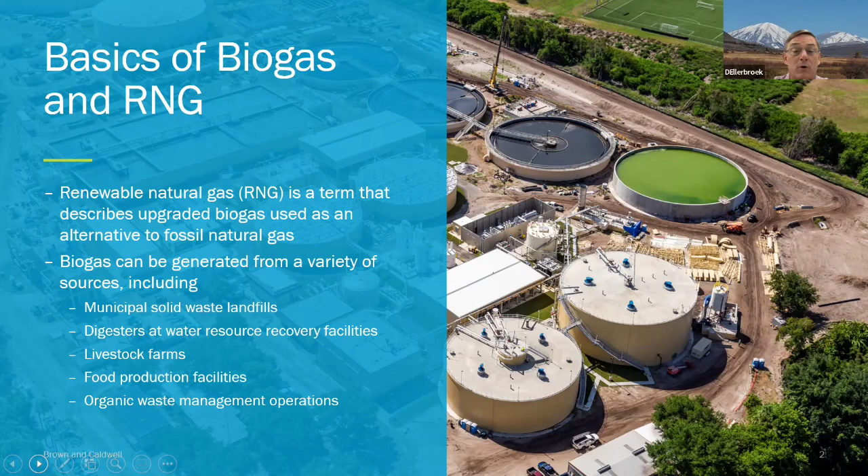So basically, the content of your gas can vary based upon your feedstock and your generation method. So what you're seeing here is two of the common sources for biogas. One is landfill waste, and then the second one down below there is anaerobic digestion, which can be animal waste or food waste or any organic waste for that matter. But biogas from organic sources made through anaerobic digestion generally contains about 45 to 65% methane.

So you have to treat that biogas to remove a number of constituents, moisture, particles, contaminants, and then other gases such as carbon dioxide, oxygen, nitrogen, and VOCs. So the goal of the treatment process is to get the methane content up to around 90% or greater. And then you can produce RNG compressed gas and put that into your natural gas pipeline.

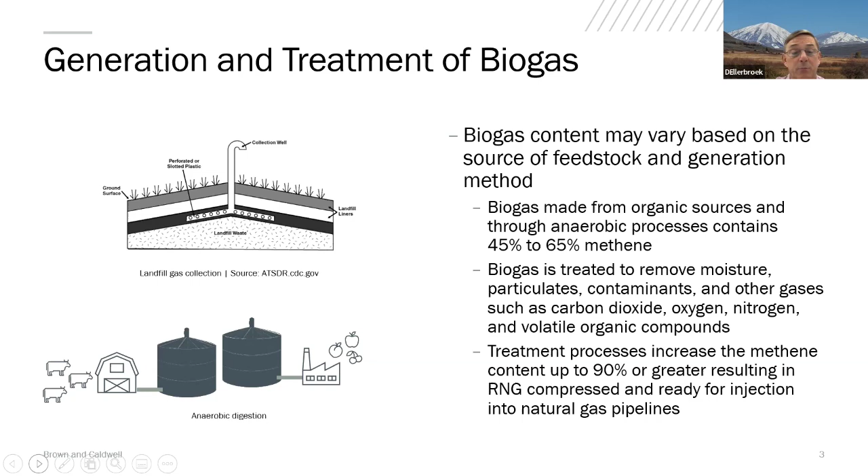So this slide basically shows a couple of different processes for two of the more common sources of biogas. On the left-hand side, we have landfill gas treatment stages. And on the right-hand side, we have anaerobic digestion. You can see that looking at the end uses, they're basically the same. It's heating, electricity, or other industrial uses. But if you look at the process, it's a little bit different.

So when the gas comes out of the landfill, you have to go through what they call a knockout pot, which basically removes moisture, and then the gas is filtered and may be flared to get rid of some of the contaminants, some of the non-methane gases. And then you go into a secondary treatment process where you have moisture removal, taking out the sulfur. You then compress that, and that's your biogas.

And then to get to RNG, you have to go through an advanced treatment process. And that's basically to get to the quality that you can put in the pipeline or use for vehicle fuel. So we're going through a process of removing a number of the gases, carbon dioxide, oxygen, nitrogen, VOCs, then you may have to flare some of the contaminant gas, but then it can be compressed and used as RNG. So on the anaerobic digestion side, you can see that it's a little bit simpler.

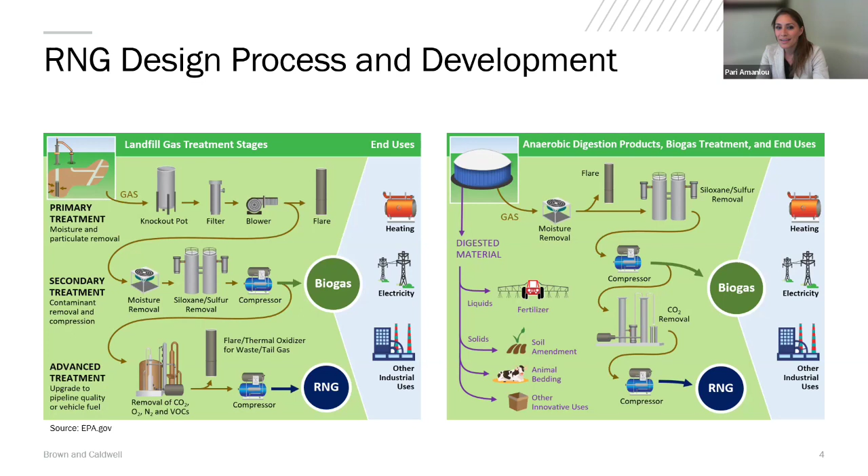And it's important to note in anaerobic digestion, moisture and pH levels definitely yield different amounts of methane through the process. So tweaking those parameters can improve your process dramatically. With landfill, you pretty much end up with what you end up.

Right. And you'll see, I think it might be the next slide. No, it's coming up, but in one of these slides, you'll see how the landfill gas has been going on for some time, but we're really seeing a big uptick in this animal waste anaerobic digestion over the last few years, I think since like 2018.

So there's a number of applications and benefits associated with RNG production. One of the things you can do is produce green electricity, so non-carbon fossil-based fuel that burns in an engine to create electricity. You can produce bioproduct feedstock, such as plastics, makeup, diesel, and other chemicals.

There's roughly about 2,200 large U.S. wastewater facilities right now that produce about 4.7 million dry metric tons of biosolids, and of that, about 4.2 million were disposed on the land. So there's a lot disposed of using land application, landfill, or incineration. I'm sorry, those three categories. So, Pari, were you going to add something to that?

It just goes to show with population growth that we have an enormous amount of opportunity here to capture those solids and utilize them in a fashion that limits land application and also generates renewable resources for us in the energy sector. Right, and it's not just the solids.

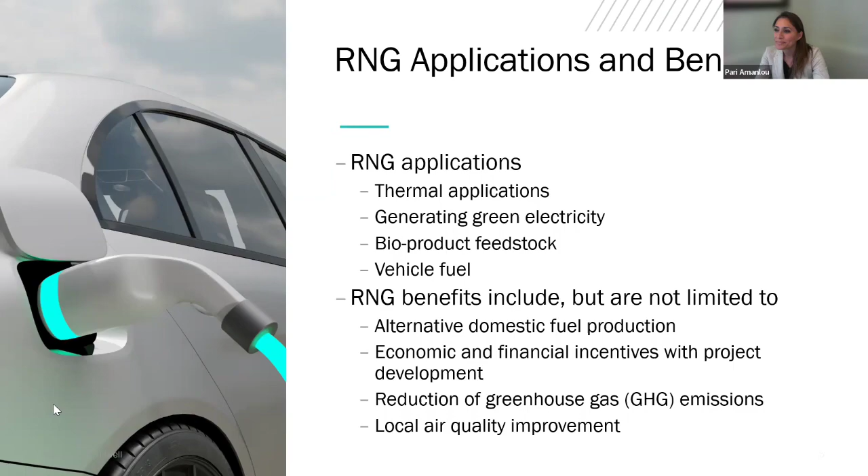Fun fact to add here, Dave, is about 9% of methane emitted into the air is from animal waste and manure. So it's a large source of our methane emissions into the atmosphere.

And with that also a great amount of opportunity to capture that methane, a large sum of methane. And that's why we're seeing an uptick in particularly ag RNG projects. Initially, there's a large source of methane there, but now we're also seeing a shift to using other forms such as biosolids, co-digestion with food waste and animal waste as well.

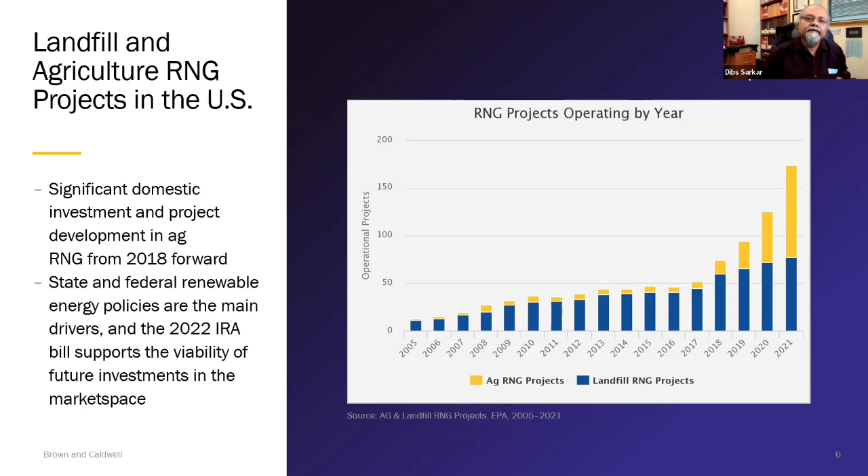Yeah. All right. Okay, let's see where we're going. I got to reduce this. I believe we skipped one, Dave. Did I skip one? I believe so.

Yeah. So you want to talk to this?

Absolutely. Some of the benefits of RNG in comparison to other renewable energy sources: anaerobic digestion and biogas are not subject to weather or seasons, unlike wind and solar that are dependent on wind patterns and seasonality. If the sun doesn't shine, you don't have solar power. It's a 24/7 operation. So as long as you have feedstock, and that feedstock is typically generated pretty consistently on farms, municipal waste facilities and other industrial facilities, you can pretty much count on generating biogas and through that developing RNG.

Because of that, it's considered a base load renewable energy, meaning it's consistent in its production. And it's not necessarily used as a supplemental energy form, but it can be used as a primary energy form. And in many cases, we're also seeing that biogas is used to create electricity. And during peak hours, or depending on seasonality, whether it's a cold weather front or extremely hot weather days, it's used to dispatch power into the grid system for maximum dollars per kilowatt hour.

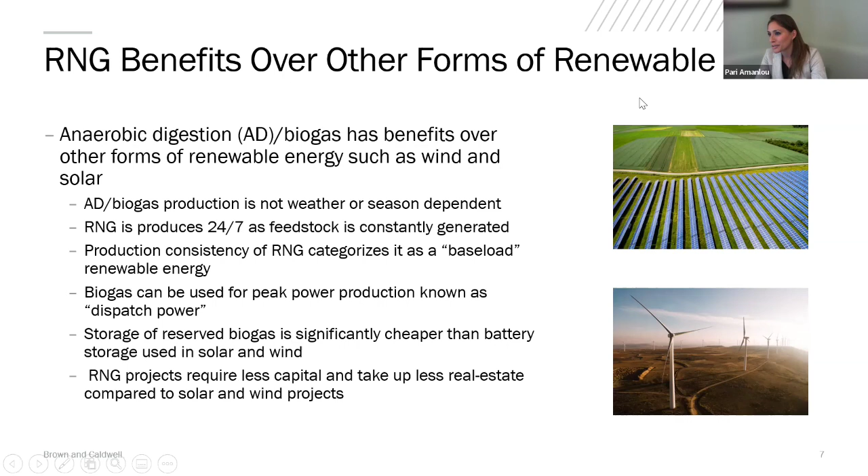Thank you, Pari. Absolutely.

So some of the other benefits of RNG over other forms of renewable energy is it can be used as a primary source of revenue for producing green electricity. So that is one of the primary sources of revenue, selling the green electricity or the RNG. But it also has secondary sources of revenue, which can include tipping fees for waste dumping. Like in the case of a regional digester, you could have people pay to dump their waste there.

You can sell some of those secondary products, such as carbon dioxide, the fertilizer, which is ammonia, or animal bedding, fiber. And then capturing the biogas can reduce greenhouse gas emissions for industrial facilities and result in carbon credits. And we're going to talk a little bit more about those that can be sold in the cap and trade market. So Pari, do you have anything you want to add to that? I think that pretty much covers it.

The big takeaway here is, as Dave mentioned, with other forms of renewable energy, such as solar and wind, you have one source of revenue, and that's the power that you produce. With RNG, in addition to the actual fuel that you produce, which is RNG, and the conversion of that potentially to electricity when it makes sense, you have secondary sources of revenue that can be very viable to the project and to the rate of return on your project.

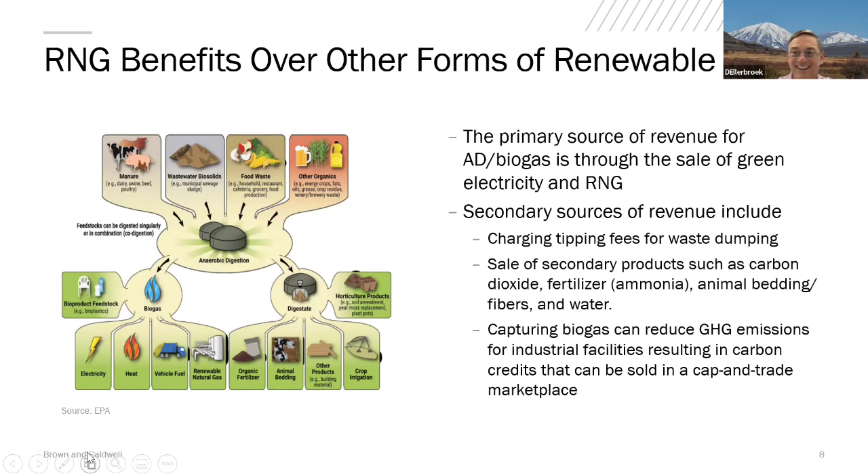I saw the other day that the CO2 shortage is affecting the craft beer industry, which is running out of CO2 for carbonating its beverages. So that is a major societal driver, right? You got to make sure we're producing enough craft beer. All right. Pari, I'm sorry to do this. You mind talking through these? You're better at this stuff than I am. Oh, yeah, that would be a horrible thing, if we don't have craft beer, right? Yeah, it'd be horrible.

So RECs are what we typically talk about in our sector. They're renewable energy certificates, which are basically tradable, non-tangible energy commodities that represent proof of 1 megawatt hour of electricity that was produced using renewable resources. Those renewable resources could be RNG, basically non-fossil based, that were utilized to generate electricity.

Many states have developed renewable energy portfolios to promote green electricity, green and renewable energy sources. And as such, they mandate their electrical utility providers to purchase a percentage of their needs through these RECs. In some states, this is mandated, and in other states, it's voluntary through the ESG goals that the organizations put together. We're seeing companies such as SoCal and PG&E.

They are in a market that requires them to purchase a number of their megawatt hours from green sources. And then in other markets such as Colorado and I want to say New Mexico, Xcel Energy is purchasing a percentage of the electricity that they're providing to their end users because of the ESG goals that they have, and it's not necessarily mandated.

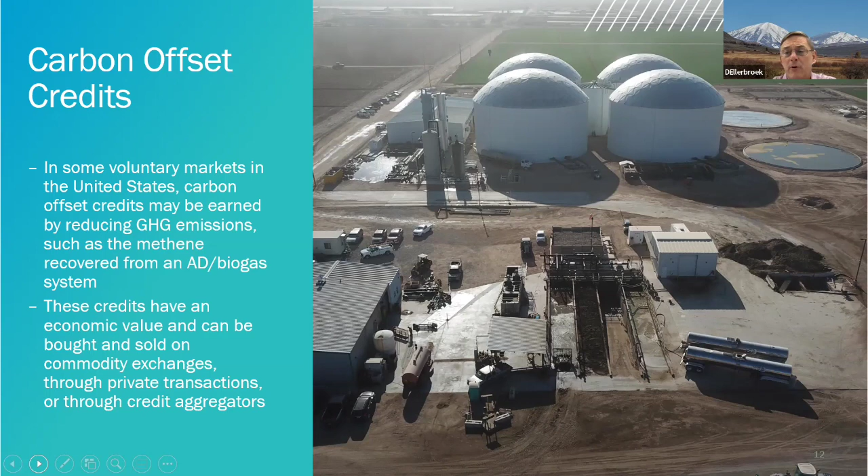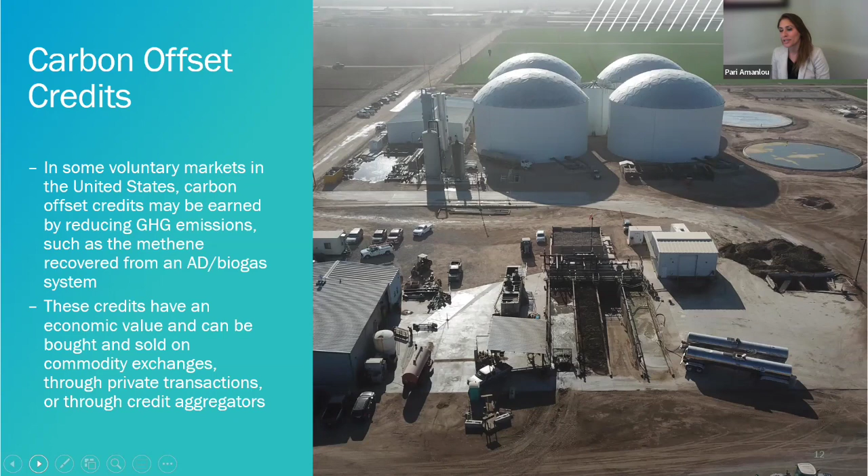Are there like regional markets? I mean, you mentioned state markets like California and Texas. Are there regional markets like in the Northeast or the Midwest where states have kind of gone together to create a commodity pool for these? It's certainly, I would say, the more green the state, the value is greater. The New England states and West Coast definitely. Outside of that, I think it's catching on, but it's slower. Obviously, if it's federally mandated, we'll definitely see a shift in that space within all states. The carbon taxes being proposed right now will definitely have a dramatic effect in the industry across the United States.

Cool. You want to talk through this one, Pari? You're probably, did I skip a couple? Whoops. Sorry, Dave, I lost you. I'm sorry. I thought I might have skipped some slides, but I guess I didn't.

This is, I think we spoke about this. Essentially, when you're producing RNG, depending on what your offtake contract is and where the destination of the molecules are, you can utilize the federal programs and buckle in state programs as well to truly increase the value of gas. In some states, we're seeing that the unit of gas is being sold for $80 to $120 when regular natural gas is being traded at $3.50. So you can definitely see the drivers there and the incentives that are pushing for the development of RNG.

Thank you. So just to kind of recap, some of the revenue sources. So we got the direct sale of the biogas. We got the tax credits, the renewable energy credits, the renewable fuel standard, carbon offset credits, potential organic byproducts, potential fertilizer, nutrient enhancement materials, and potential tipping fees. So all those are things that can be economic drivers for the renewable natural gas project, as opposed to just, as Pari mentioned earlier, just selling the gas or the energy itself.